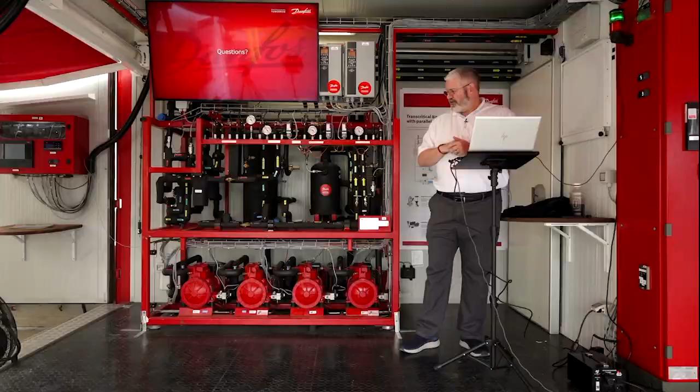You have a service valve that wasn't open, something like that, but that doesn't actually get on the service techs. That discharges into the relief header, which will be piped to outside the store. I have been on sites where we had a vibrating compressor that cracked a discharge line. So you see kind of a little bit of a fog in the area.

But safety wise, the only thing I've really seen that was dangerous was I saw a technician looking for a leak with his hand. And I personally feel like that's dangerous because if you're on the discharge side of the system, that could be 1,400 pounds, and even a little pinhole, it's going to be a lot stronger than your skin. So I would highly recommend not looking for leaks with your hand on a CO2 system.

Worst case, if you want to use that method, get a piece of cardboard and use that because you don't mind if it gets cut. Past that, I haven't seen any safety concerns as far as things rupturing and getting on technicians.

What are the symptoms of low refrigerant level and how is refrigerant level monitored? That's a great question. So most of the manufacturers will put both a high level switch and a low level switch because both conditions are bad. If you hit the high level switch, you got too much liquid in the system. You may have some variance in the system based on having reclaimed devices like that.

The low level switch is important because if you're not sending liquid to the evaporators, you're not removing heat. The symptom would be you're struggling with cases making temperature. You don't have enough liquid in the system. You can't pull everything down. So you would see temperatures rising. You should have gotten an alarm for that, by the way, based off the low level switch.

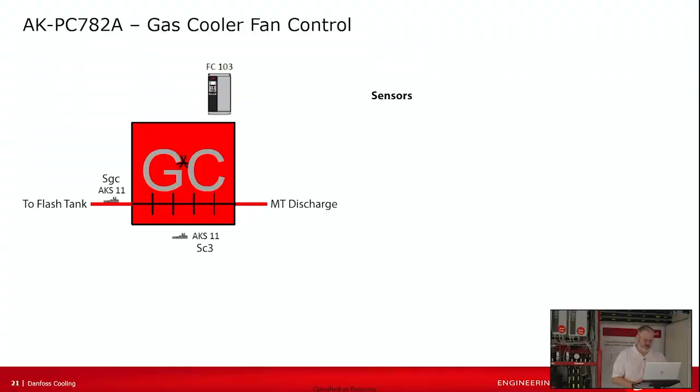Can the fans and high pressure valve fight each other? So that's a great question, and the answer is actually no. If you'll remember back, let me see if I can bring this up. So the question was, can the high pressure valve and the condenser fans fight each other? So if you'll remember, what we're doing is TD control between the ambient sensor and the gas cooler outlet sensor.

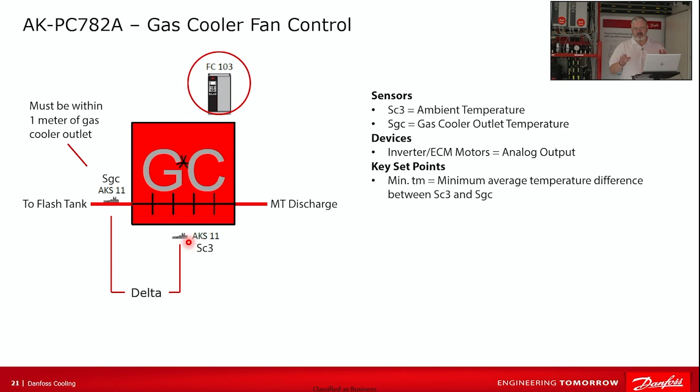So the actual fan speed control, it doesn't talk to the high pressure valve, doesn't care about it. Its only purpose in life is that whatever this ambient temperature is, I want to make my outlet temperature no more than 5 degrees above ambient. And it does that at all times. On the high pressure valve side of that, if we look back at how it controls, it doesn't really care about the delta between these two.

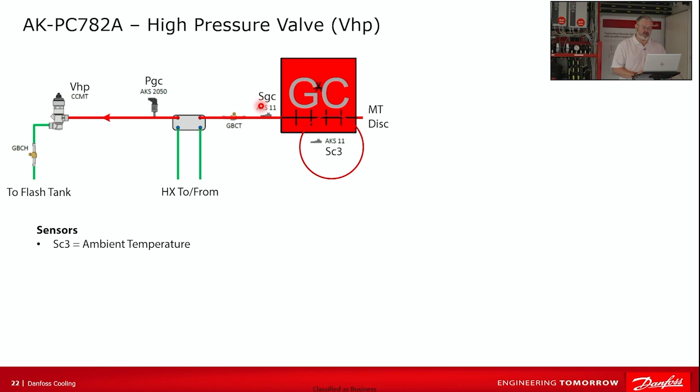So if we look back at the high pressure valve, remember the gas cooler fans, all they care about is the difference between these two. And then the high pressure valve, all it's really trying to do is make this temperature land on our maximum COP line that we saw earlier.

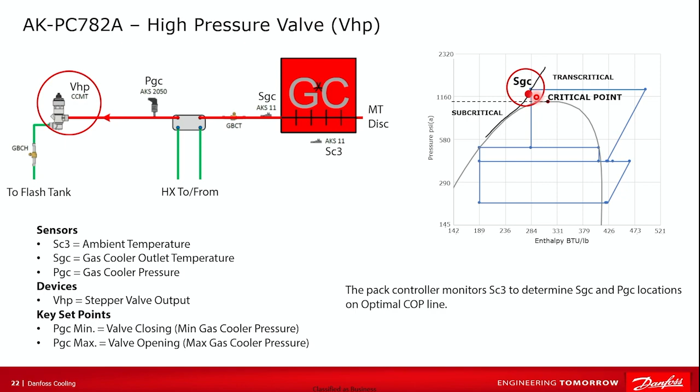So they are connected in the sense that what the fans are doing has an impact on the outlet temp from the gas cooler, but they don't necessarily fight each other. The high pressure valve would react as this moves to try and bring it back to that line. So there's never a chatter, which I think might have been the intent of the question.

What leak detector do you recommend for leak checking CO2? So this is our DGS gas sensor. It's basically our CO2 sensor. Typically, you're going to have one mounted low on any refrigeration system. So as a Danfoss employee, I would recommend this gas sensor.

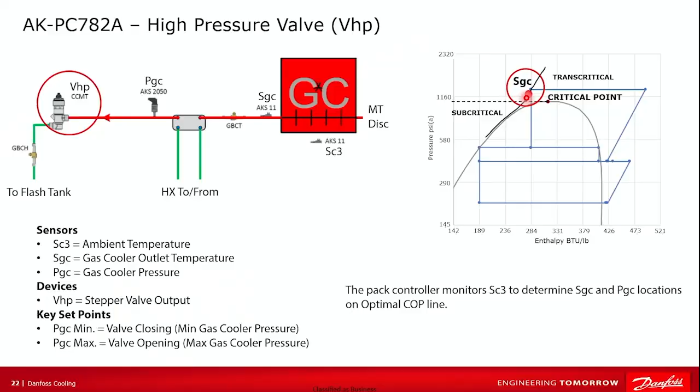If you're looking for leak detection that's permanent. If you're looking for a wand leak detector that you walk around and sniff the system with, I'll be honest, I'm not familiar with the different categories. The only times I've done that, I borrow it from the contractor. So my recommendation is borrow it from your friend.

Do you always want the gas cooler operating in the transcritical zone? So the answer to that is really no. It operating in the transcritical zone is based on ambient temperature. So if you picture inside the gas cooler, I've thrown out the number of 87 degrees several times because that's the actual critical point, but that's not really ambient.

82 degrees ambient would be your critical point if you're going to have the outlet of the gas cooler be 5 degrees higher. So at 82 degrees, you're really 87 inside the gas cooler. If the ambient gets below that, then you're going to be below the critical point and operating in subcritical. So it transitions between the two throughout the year, even on a summer day when you're 96 degrees at lunchtime, you're 72 degrees at night, you were transcritical at lunchtime and you're subcritical that night.

Are sites using CO2 keeping additional refrigerant on site? The availability? Yes, they are. So it's asking about quantities. One thing I'll note on that I wasn't aware of till recently is the cylinder providers, Airgas and such, they do charge a storage fee for you having their cylinder over long periods of time.

So, especially people that are new with CO2, it's new, it's different, it must be spooky. They'll get an additional charge to keep on site in perpetuity. But there is a cost to that. I don't know the dollar amount per cylinder. I think I heard the number of $30 or $40. But if you times that times 15 cylinders times 3 systems times 12 months, it's not financially viable to keep them around long term like that.